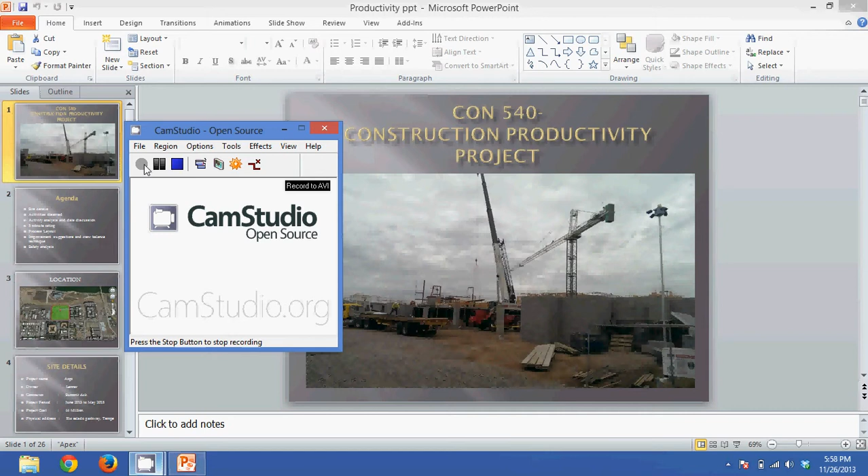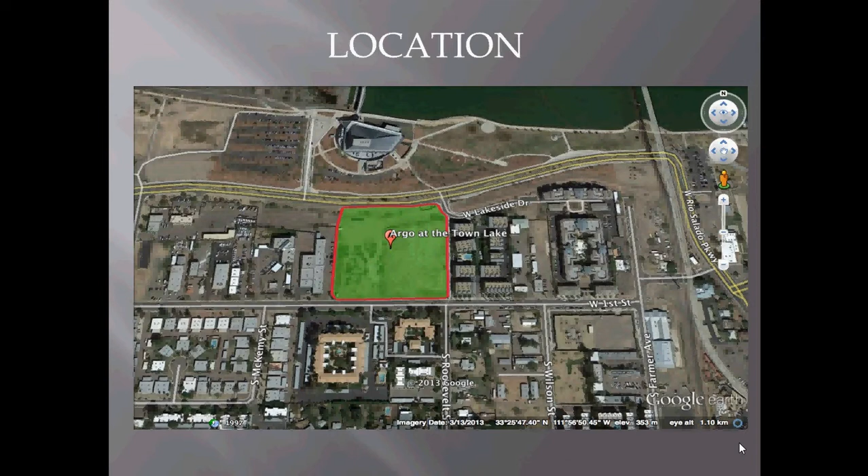I'm going to give you a short presentation on Argo residential building. This is the agenda for the project. Coming to the location, Argo is located right in front of Tempe Town Lake, which is near Rio Salado Parkway. Coming to the site details, Summit DCK is the contractor for this, and the project started in June 2013 and expected completion date is in the first quarter of 2015. The project cost is around 44 million.

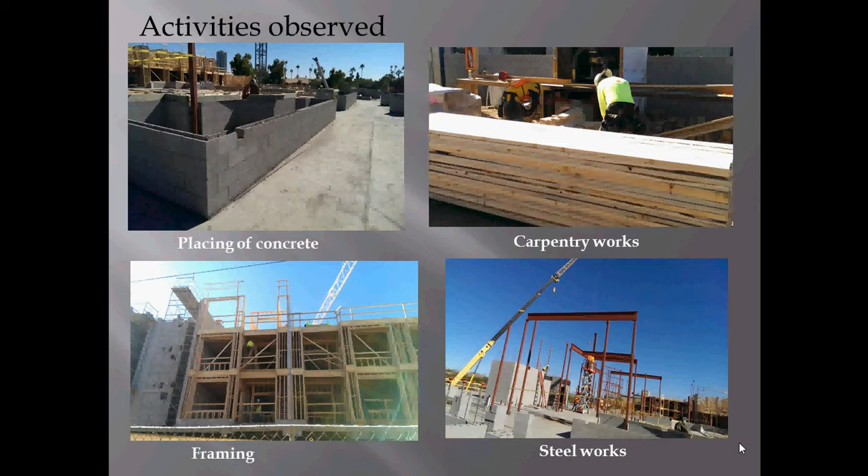Some of the activities observed on site are placing of concrete, carpentry works, framing and steel works. Rebar placement is one of the major activities observed, which I will show in the 5-minute rating. So I have covered the whole site and taken observations on 6 different dates and came up with 610 observations. And the average percentage of direct work came to be 40.26.

45.28 is the highest percentage of direct work on 16th of October, where the total number of workers involved is 106. Similarly, 37.37% is the lowest percentage of direct work, which is observed on 22nd of October, where the total number of workers involved is 99. So this difference might be due to the time variations and the number of workers involved.

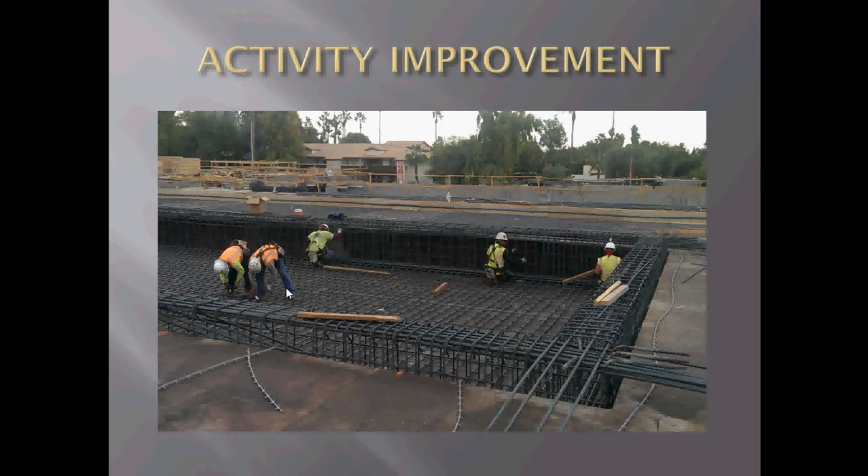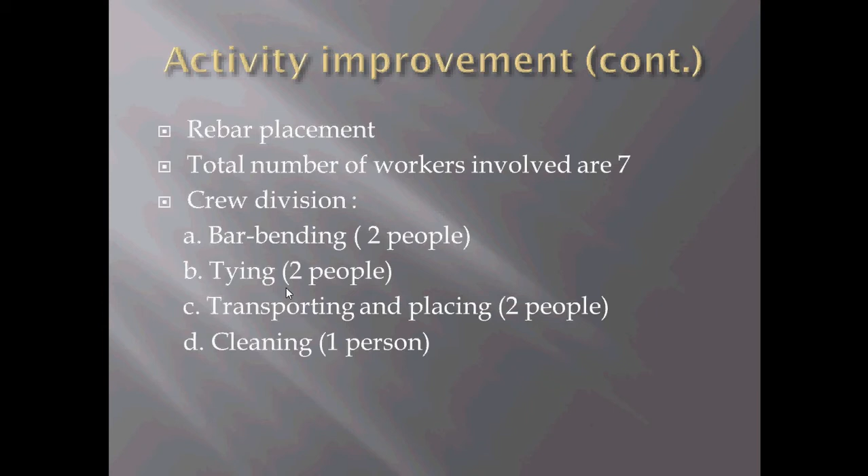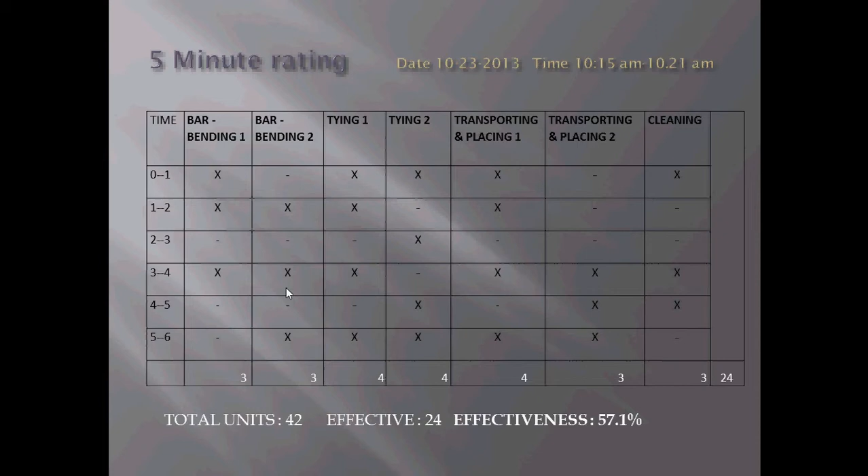I have taken up rebar placement as my activity improvement. The total number of workers involved in one particular area is 7: 2 people involved in bar bending, 2 people in tying, 2 people in transporting and placing, and 1 person involved in cleaning. So I've done 2 different 5-minute ratings on the same day. In the first one, the effectiveness came up to be 57 percent, and in the second one, the effectiveness came up to be 60 percent. So it was pretty much the same.

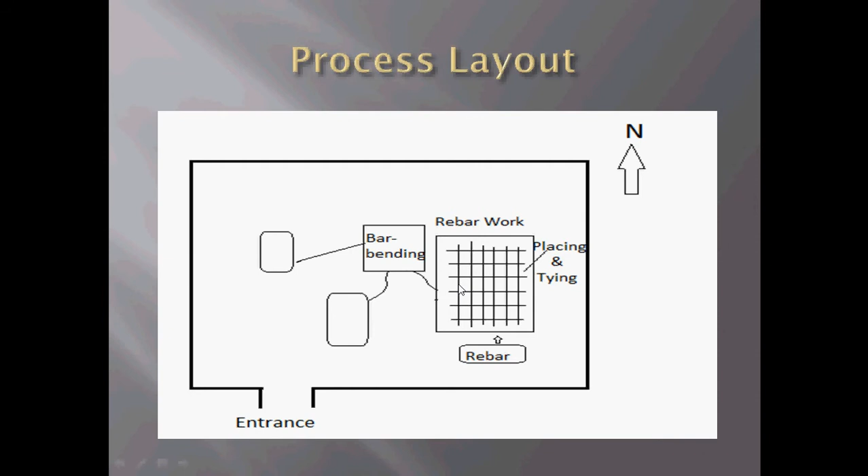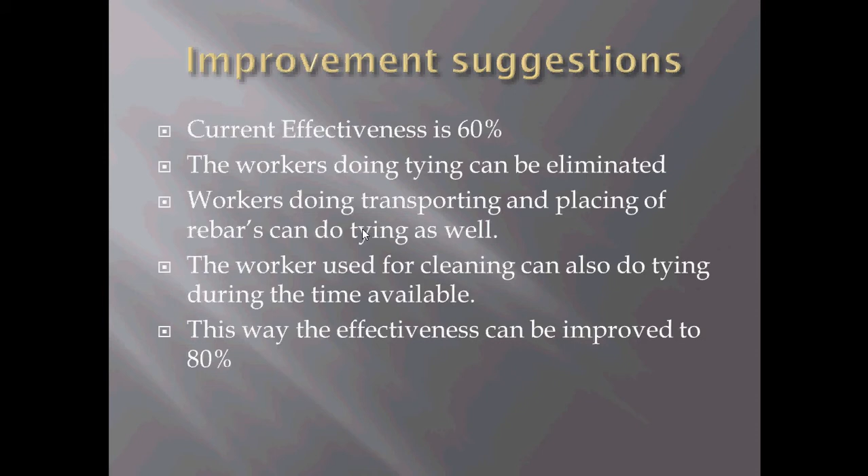Some of the suggestions I would make are to remove the workers involved in tying and replace them with transporting and placing people. Similarly, the person involved in cleaning can also do tying, so this way the effectiveness can be improved from 60 to 80 percent. So applying this to the crew balancing technique, eliminating the people involved in tying and substituting them in transporting and placing, and also in cleaning, the effectiveness can be improved from 60 to 80 percent.

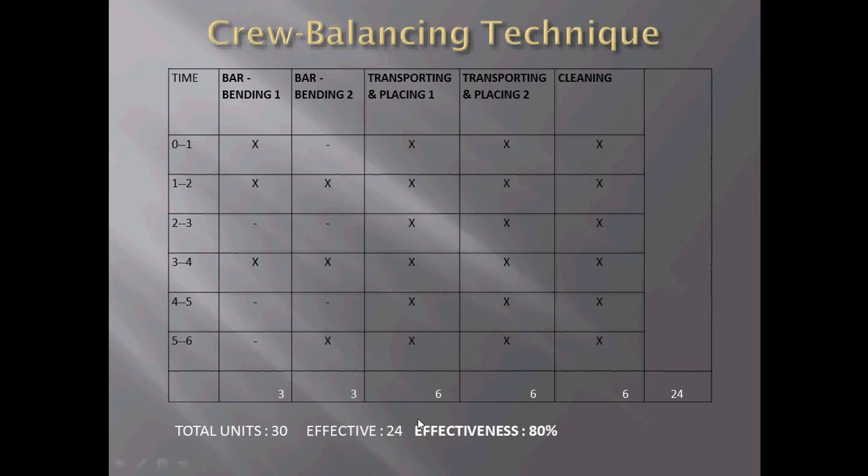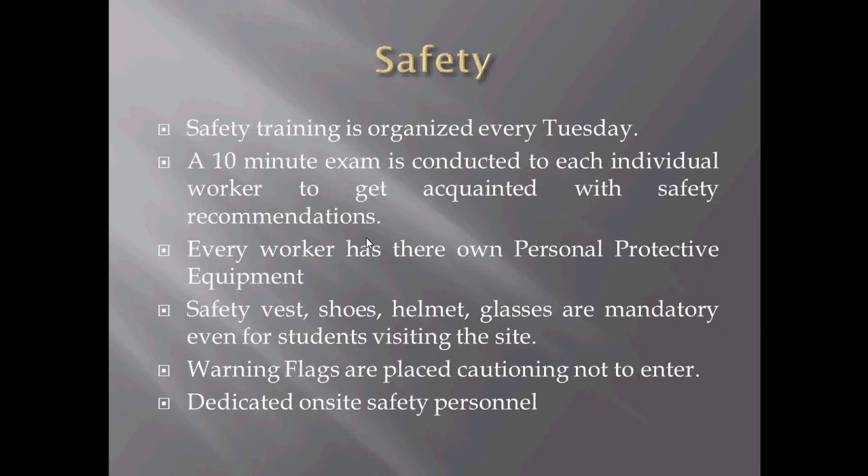Coming to safety, Summit DCK is high on safety. A 10-minute program exam is conducted for each individual to get acquainted with the safety recommendations every Tuesday, which is a safety training day. And also every worker has their own personal protective equipment. There is dedicated on-site safety personnel as well. And there are cautions on and around the site like the one shown here for scaffolding. There are caps provided on the rods to avoid injuries.

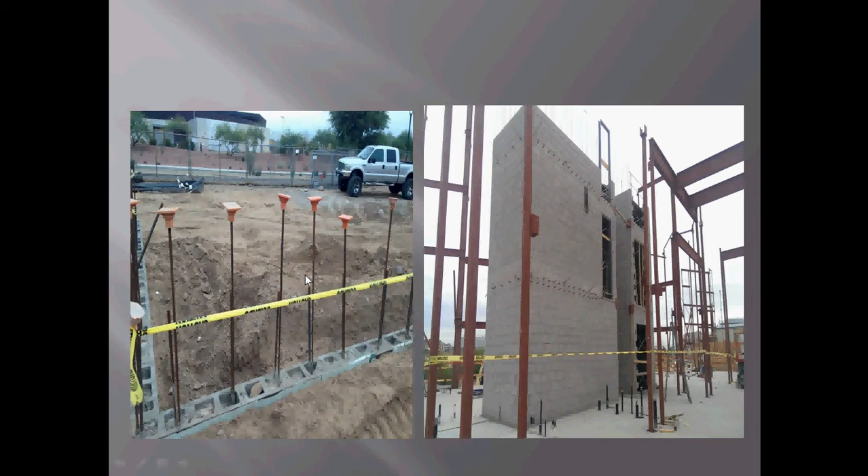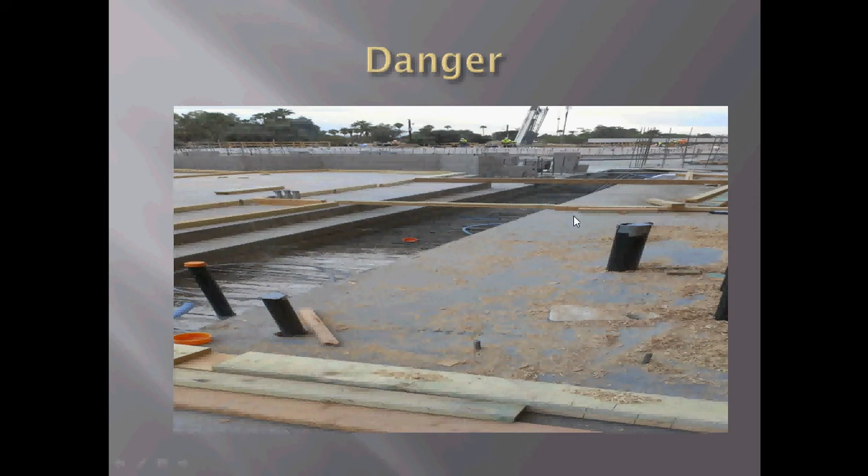Apart from safety precautions, there might also be danger due to the rod extensions on the floor like the one shown here, and also people trying to move from one side to the other with the help of the wooden frames, which is not safe. The rebars are placed outside, which results in rusting and wastage, so proper inventory must be provided for rebars. Some of the recommendations I came up with are to remove the materials or waste materials from the site as soon as possible in order for the workers to move from one site to the other safely, and also to provide safety nets to avoid falls and accidents.

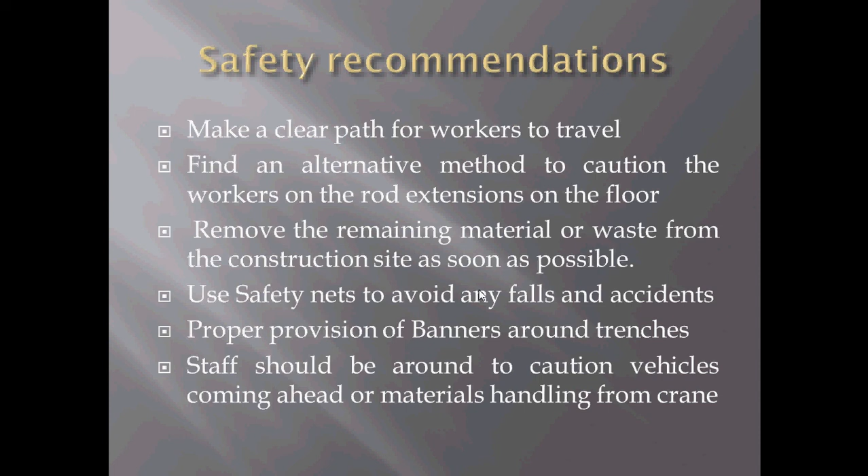And I have observed there are no banners on the site around trenches, so proper banners must be provided around trenches, and there should be dedicated staff to caution the vehicles coming ahead, and also to clear a path for workers to travel. So these are some of the safety recommendations. So this is my whole project on Argo residential building.